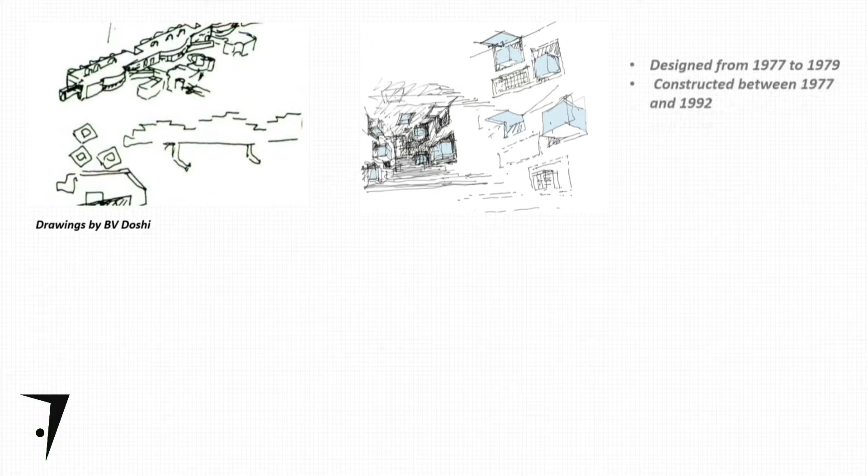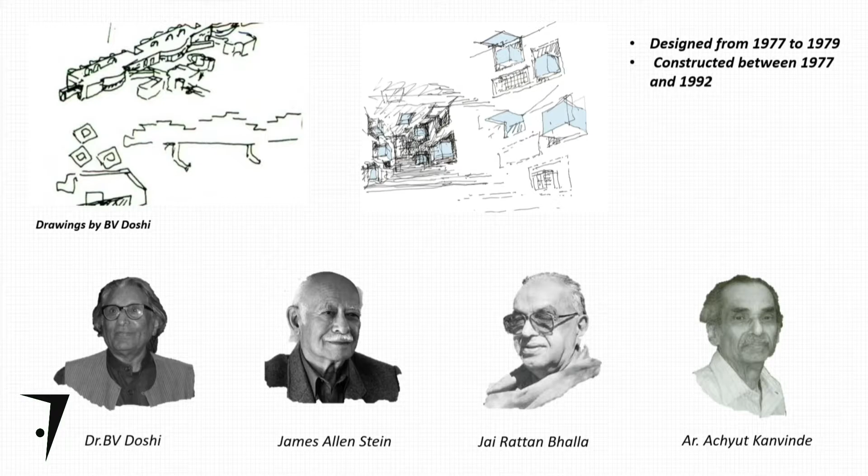of contemporary Indian architecture. The complex at Bangalore was designed from 1977 to 1979 by Doshi in collaboration with James Allen Stein, Jai Rattan Bhalla and Achyut Kanvinde, and was constructed between 1977 and 1992.

Now talking about the location and climate. Bangalore is located in the south of India and the southeast of Karnataka state. The address of the complex is Bannerghatta Main Road, opposite Apollo Hospital, Sundar Ram Shetty Nagar in Bangalore, Karnataka. Bangalore comes under the moderate climatic zone and the site is located in a tropical climate. April is the warmest month of the year and the summers are much rainier than winters in Bangalore.

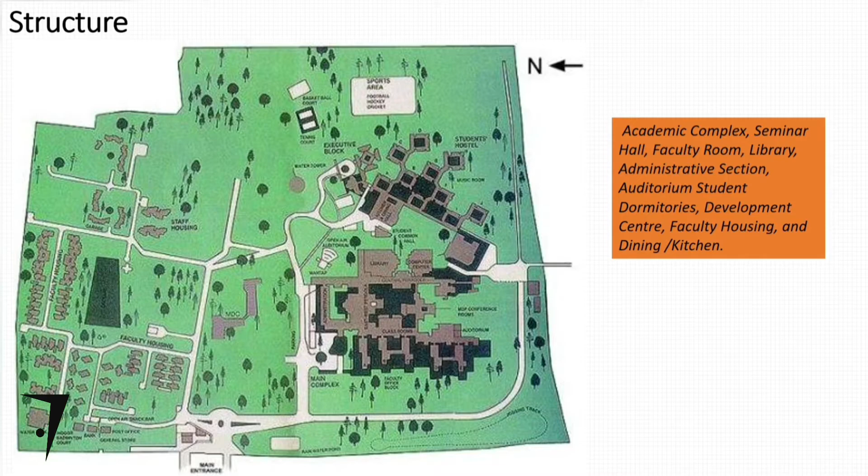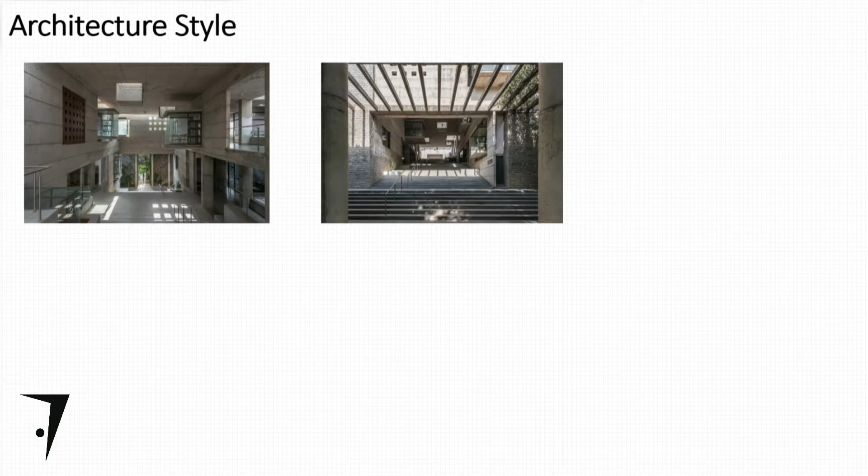Now talking about the architectural style. The IIM complex at Bangalore is one of the key works because it appeared not to have its roots in the soil, and he had to develop a new kind of architecture more appropriate to the vision of New India. A kind of architecture which is more sensitive and responsive to the people, their traditional and social customs and philosophy of life.

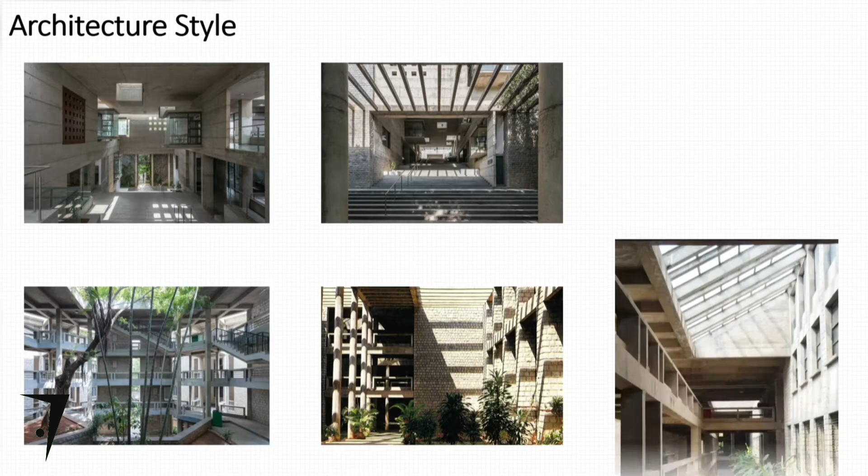Taking inspiration from the Indian architecture of the past, the IIM complex at Bangalore is one of the appropriate examples of such a new kind of architecture. The enormous complex was designed in such a manner that it resembles a city, a whole environment or vastu, more than a freestanding building. On numerous occasions, Doshi did express his admiration for traditional Indian architecture and urban design.

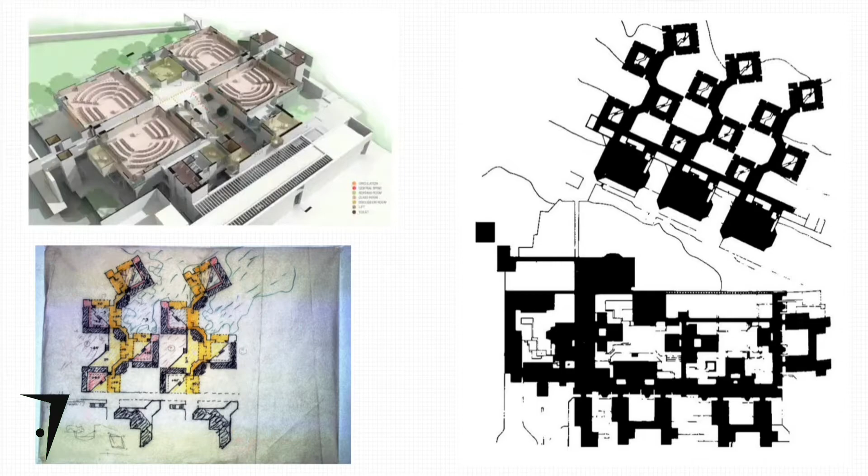Now talking about the concept. The IIM complex was inspired especially by two large ancient Indian complexes. The first is the Royal Complex at Fatehpur Sikri near Agra and the second is the Meenakshi Temple or Sundareshwara Temple complex at Madurai. The concept of the campus derived from the Mughal city Fatehpur Sikri, having a series of squares, courtyards, passages, colonnades, etc.

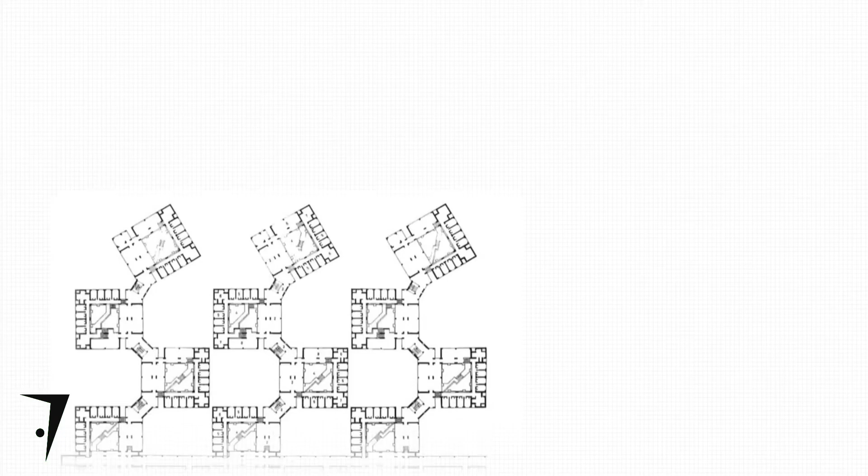On one side, it is evident that Doshi borrowed the idea of numerous interlockings between the building masses, courtyards, the ambiguous border between indoor and outdoor, and all the interstitial spaces, as well as the concept of multiple axes and local symmetry, which sometimes clash with each other, restraining the whole complex from becoming too formal and too monumental, instead feeling surprisingly human. On the other hand, the IIM complex is more intricate, with a complex fabric of spaces and architectural elements.

Doshi has achieved the functional planning of the campus in terms of zoning and circulation, but at the same time he has integrated nature so well. The relationship of outside and inside works out so well. All circulation spaces not only act as connectors to different spaces, but themselves act as a feature of the building.

Now talking about the planning. The campus planning segregates vehicle circulation and pedestrian circulation. There are 3 vehicle circulation roads: one for the housing, second for the main block, and third for the hostel and service entry for the dining area.

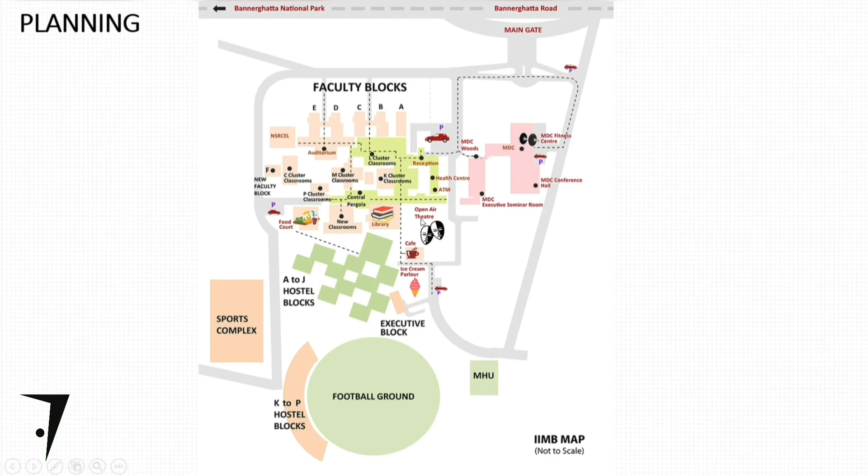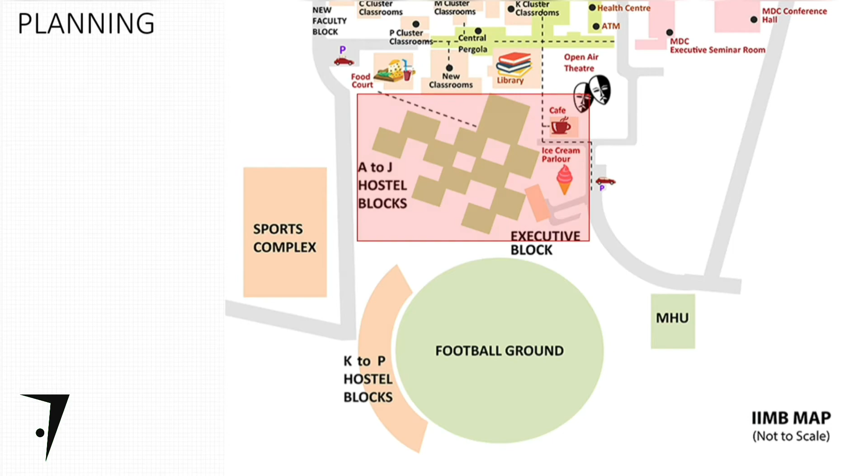The whole complex has been divided into 4 zones. The first zone is the faculty and staff zone, second is the academic and administrative zone, third is the hostel zone, and fourth is the sports area and complex zone. The administrative and academic zone has been linked to the hostel area through a pedestrian way for easy access. The hostel block and main block have been put to form a grid quadrangle skewed at a 45-degree angle.

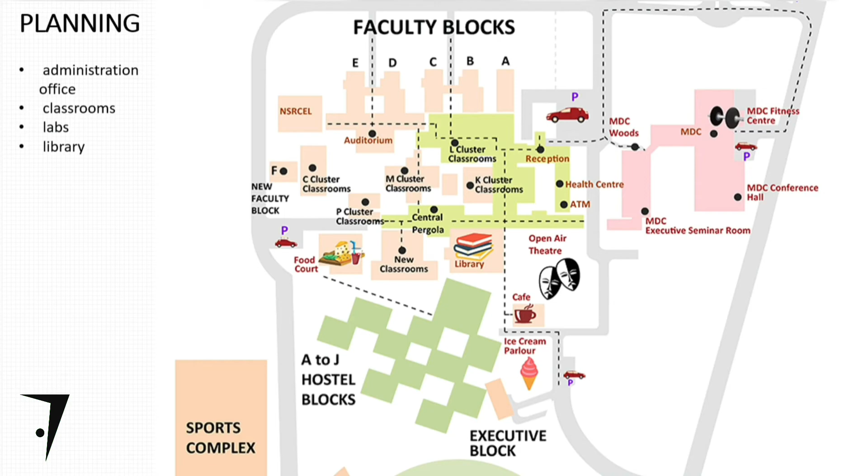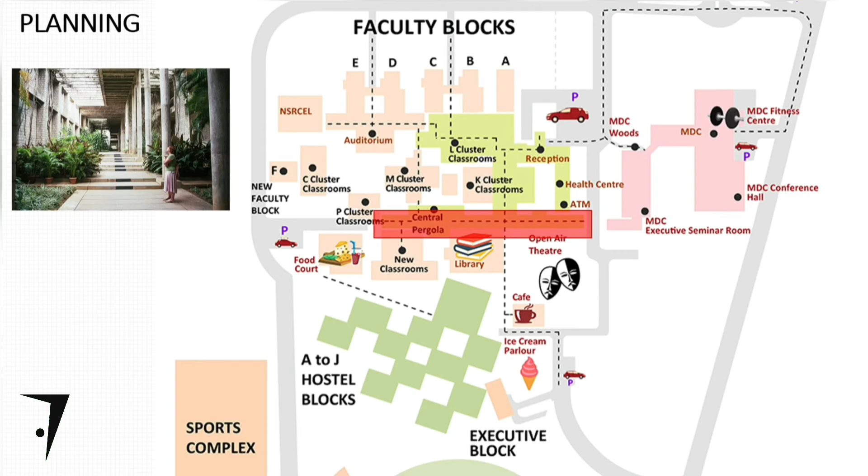The main block, consisting of administration, offices, classrooms, labs and library, has been arranged on a datum in a ladder-like pattern. This block has been designed to form a series of courtyards and terraces at different levels, linked through corridors and verandas. The teaching process could be done in the open, acting as a random pavilion. The width of the corridor has been modulated to allow casual interaction.

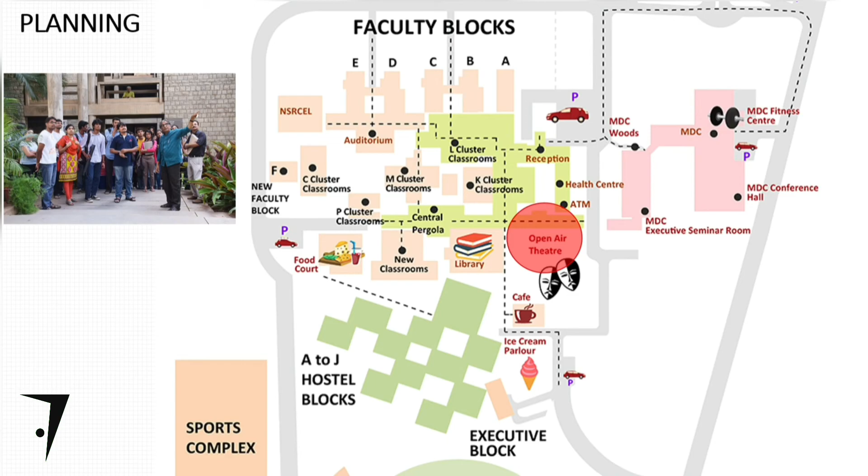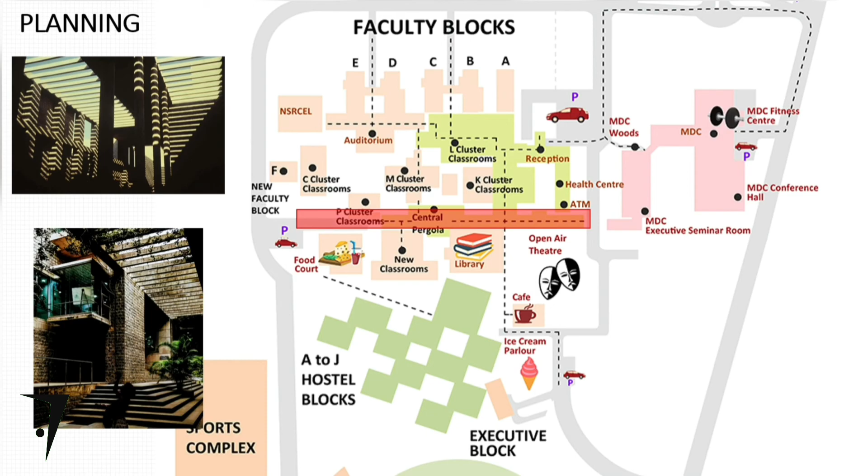The corridors have been worked out so as to allow light through pergolas and roofs on some parts of the walkway. The landscape spaces in the corridors create interest for users as well as shading.

That's it for part 1 of the IIM Bangalore complex. In part 2, we will explain the detailed plan of classrooms and all, the features of the complex and sustainable measures, and the conclusion on IIM Bangalore.